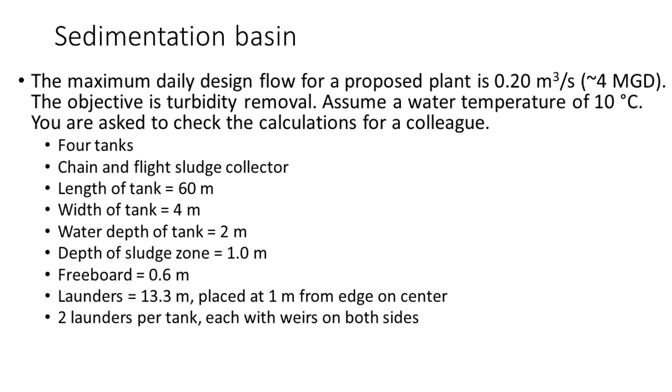So the first thing I want you to do is, just using the specifications, draw a plan and a profile view. So plan view looking down, profile view looking into the unit. So do the best you can. Talk about the information that is given, and see what you can do in terms of the plan and profile view.

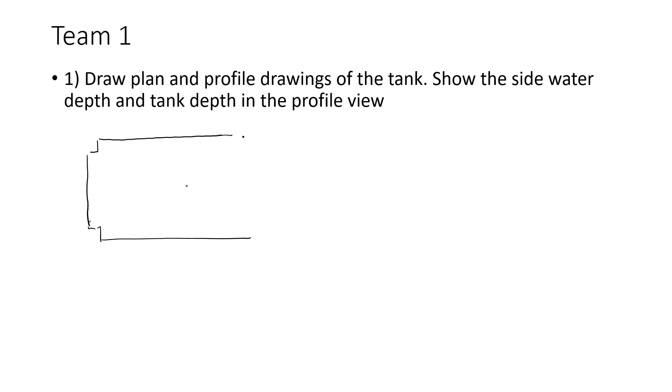I know that that's a little bit difficult of an exercise to do online, but let's think about what you were asked to do. Okay, we have a tank, and typically it looks something essentially like this. So we have an influent pipe here, and we've said it's 60 meters long and 4 meters wide. We have 2 what we call launders, and I'm not drawing this to scale.

So the launders are basically a channel with weirs on either side. The water flows into the launders and then is collected at a channel, the end here, and then piped onto the next process. And we have below this a set of chain and tee rails. So basically, this is a mechanism by which the sludge can be pushed into the hopper so it can be pumped for further treatment.

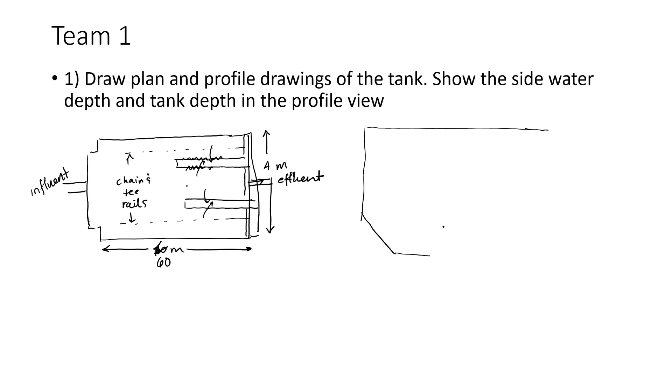If we look at the profile view, now we're looking into the basin. So what we have here is, we'll draw it this way. We have a hopper here. Okay, so this is the sludge hopper. We have a pipe. Sludge can then be pumped from there for further treatment. We have an influent channel here, but at least this gives you a sense. We have an effluent channel here.

We have what is referred to as freeboard. So this is 0.6 meters. And this is just space on the top of the water level to ensure that we don't have water flowing and splashing over the sides of the tank. We have a mechanism here. So this is our chain and flight mechanism. And this pushes sludge into the hopper. It's drawn this way so that there's a hopper.

Okay. This is our water depth, 2 meters, and we have 1 meter of sludge zone. So we're allowing 1 meter for that sludge to accumulate. And I apologize that I didn't draw this hopper very well there. Okay. And then on top of that, we also have these launders. So this is our launder that is collecting water, and then that water flows into the effluent channel.

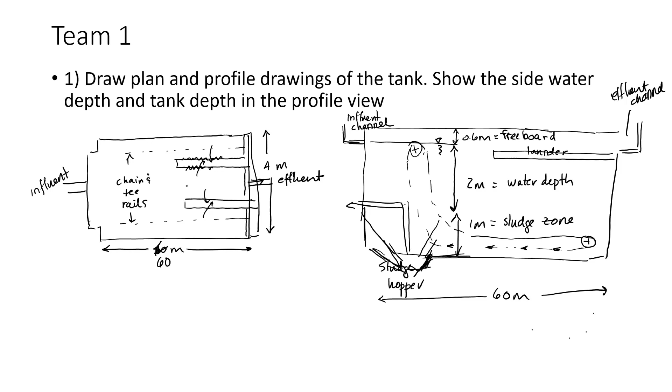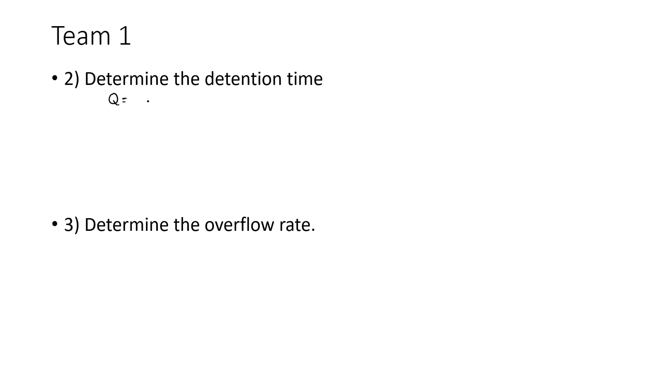What I would like you to do next in the breakout rooms, and what we're essentially going through, is some of the terminology. So I'd like you to talk over in the groups to determine the detention time and the overflow rate in this system. So we have Q is equal to 0.2 meters cubed per second. You're told that there's 4 tanks. And typically the detention time is given in hours. So we have 0.2 meters cubed per second times 3,600 seconds per hour, and that is equal to 720 meters cubed per hour.

The volume is just the width times the length times, and we'll use the water depth. That is what we have in terms of depth for the sedimentation zone. So that is equal to 480 cubic meters. So the detention time is equal to the volume over the flow rate, and that is 480 meters cubed divided by 720 divided by 4 meters cubed per hour, and that is equal to 2.7 hours.

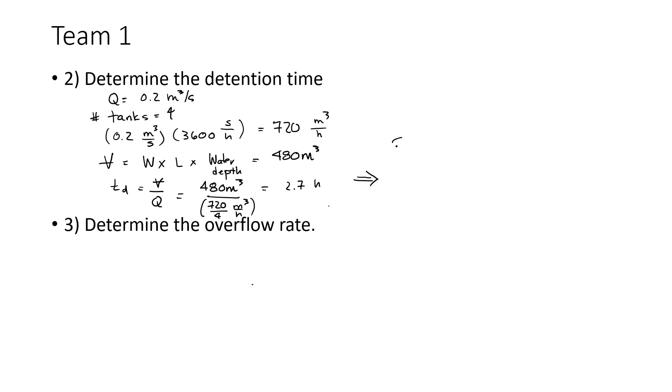In your design, and I'll be posting mini design 1 this week, according to the GLUMRB standards, which is the Great Lakes Upper Mississippi River Basin, also known as the 10 state standards, the guideline that you'll use in all of your designs, says that a minimum of 4 hours is required unless V0, the overflow rate, is less than 1.2 meters per hour, which is equivalent to 28.8 meters per day. Notice that that's meters cubed per meter squared per day, which is meters per day.

Okay. The overflow rate, some of you have gone ahead and gotten this. Okay, so the overflow rate is equal to Q over A sub S, or Q over the length times the width, which is also equal to the depth divided by T0. And that is equal to 17,280 meters cubed per day, using meters cubed per day because that's the conventional set of units, divided by 4, divided by 60 meters, times the width, 4 meters, which is equal to 18 meters cubed per meter squared per day, which is 18 meters per day.

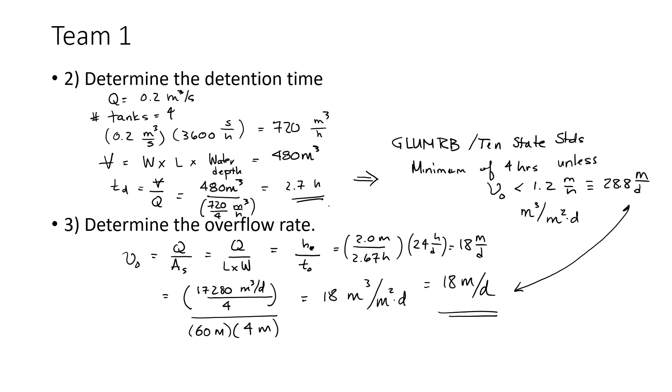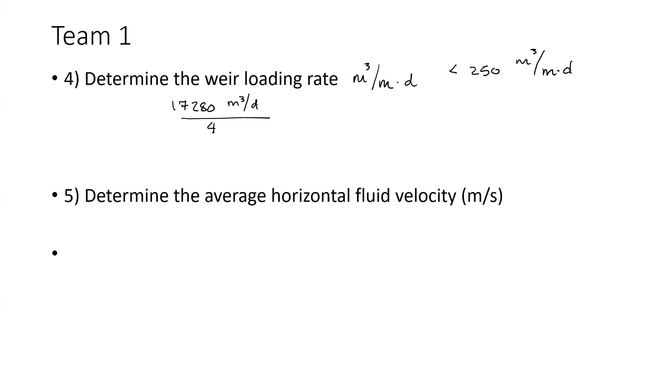We have two launders, and we have 2 sides to each launder. Okay. In some cases, these are designed with only one side. As you'll see, we could have only had weirs on one side. And that gives us 54 meters cubed per meter per day. That is well less than 250, so we're fine there.

The next thing you're asked to do is to calculate the average horizontal fluid velocity. This is V sub F, and this is Q, and I'm going to use A sub X. This is the 0.2 meters cubed per second. Now this is typically in meters per second. We'll divide that by 4. And think of the cross section across which water is flowing. So we have 2 meters depth and 4 meters width. Okay, notice we never use the depth of the sludge zone, nor do we use the depth of the freeboard.

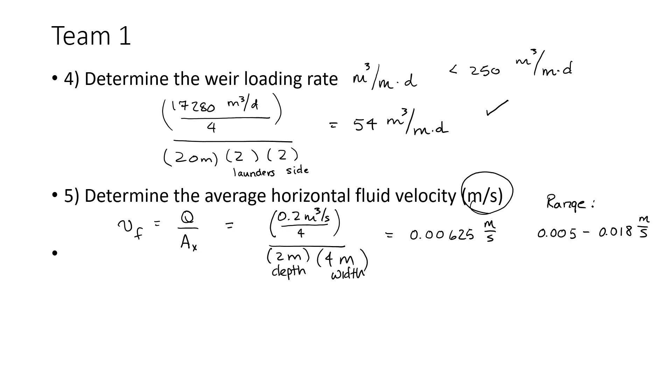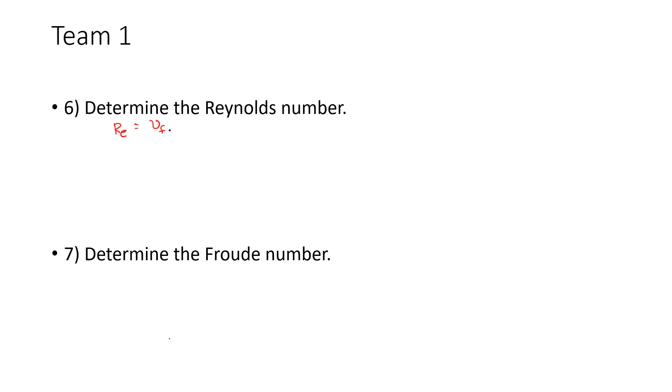Okay, the last set of calculations, we'll do it for the Reynolds number. So the Reynolds number, we're looking at ensuring that we have laminar flow. And the Froude number, we're calculating to try and avoid back mixing. So the Reynolds number is equal to the average horizontal fluid velocity times the hydraulic radius divided by the kinematic viscosity. So for sedimentation basins, that's what you will use.

The hydraulic radius is equal to the area, and it's that area X, divided by the wetted perimeter. So this is 2 meters depth times 4 meters width, divided by 2 meters depth, plus the width, plus the depth. You're looking at the basin in this direction. So we have 2 meters, and 4 meters width. And that is equal to 1.0.

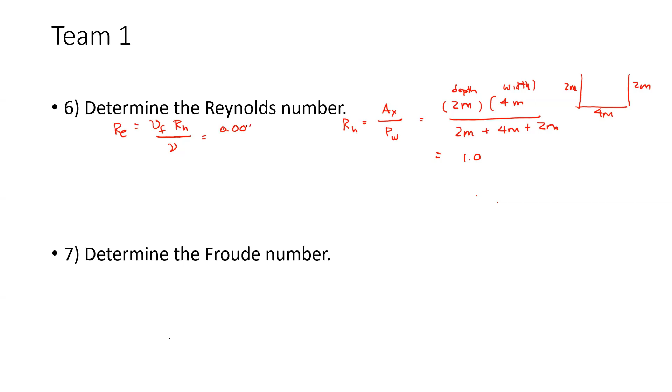We just calculated the average horizontal velocity, and that is 0.00625 meters per second. Don't forget, you've got 4 tanks. Times 1.0 meter divided by the viscosity at 10 degrees C, and that is equal to 4,782. And you want this less than 20,000, according to the textbook. So we've met that criteria.

The Froude number is used to assess whether or not we have back mixing. We want flow in one direction. We don't want back flow towards the influent. And this is equal to the average horizontal velocity squared divided by the gravitational acceleration times the hydraulic radius. And that is equal to 0.00625 meters per second squared divided by 9.81 meters per second squared times 1.0 meter, and that is 3.98 times 10 to the minus 6.

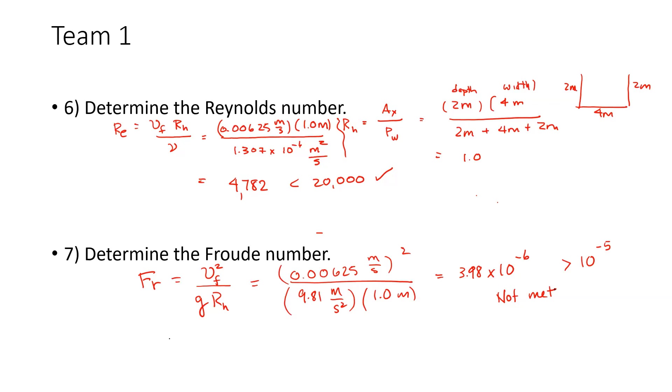We actually want this greater than 10 to the minus 5. We want it less than 1, but it'll never approach that. We have not met the criteria. But as you will find in the design calculations, it's very difficult to meet all of the design criteria. As long as you're close to this, we're going to say we're good. So my advice with all of this, learn how to use Solver on Excel. Setting up your Excel spreadsheet and setting up the criteria will greatly assist in your design for the design project.